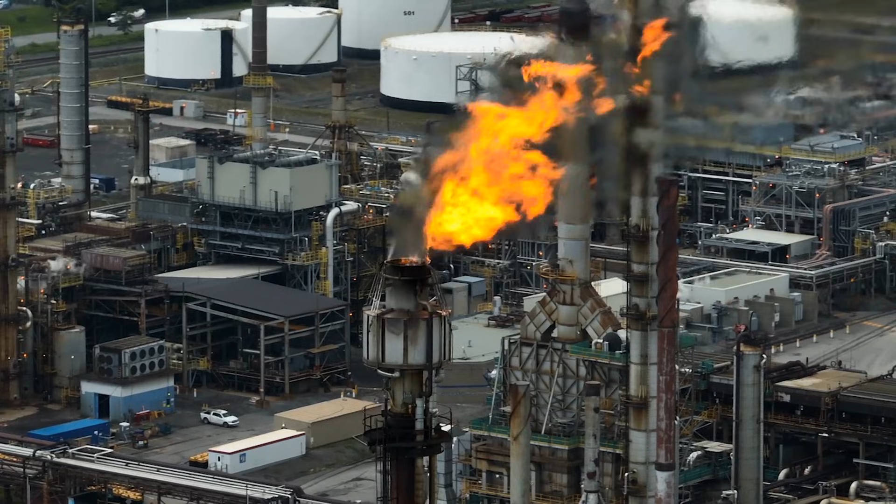On October 10th, 2024, at around 4:23 p.m., some 27,000 pounds of toxic hydrogen sulfide gas were released during a maintenance activity at the PEMEX Deer Park Refinery in Deer Park, Texas. The refinery makes more than 250,000 barrels per day of motor fuels like gasoline, diesel, and jet fuel that are exported to the US, Mexico, and Latin America. This toxic release fatally injured a pair of contract workers and injured several others.

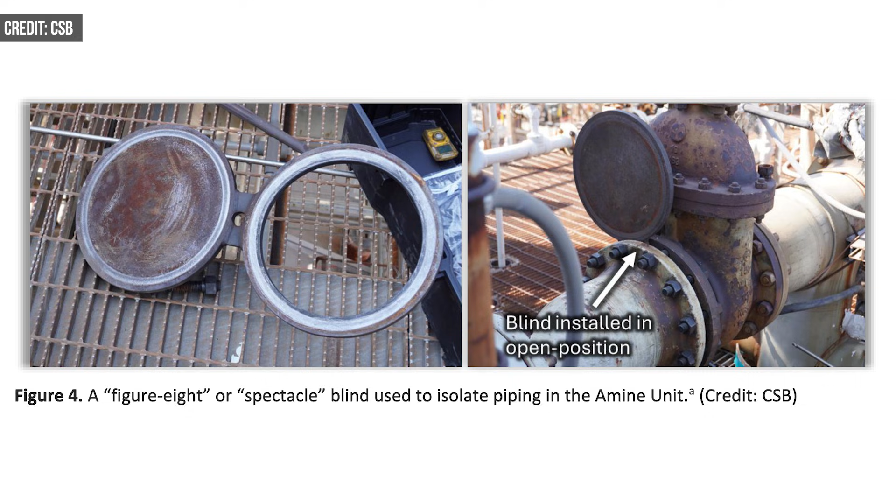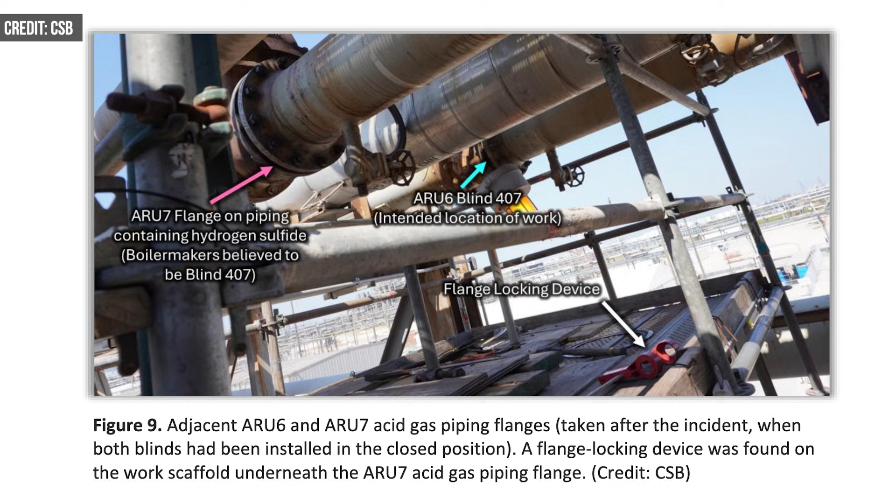So, what happened? Instead of opening a pipe flange on empty piping, contract workers from industrial service company Repcon, Inc., which specializes in welding, pipe fabrication, and maintenance, mistakenly opened identical piping about 5 feet away that contained hydrogen sulfide gas. The pipe released pressurized hydrogen sulfide gas and fatally injured one of the Repcon workers.

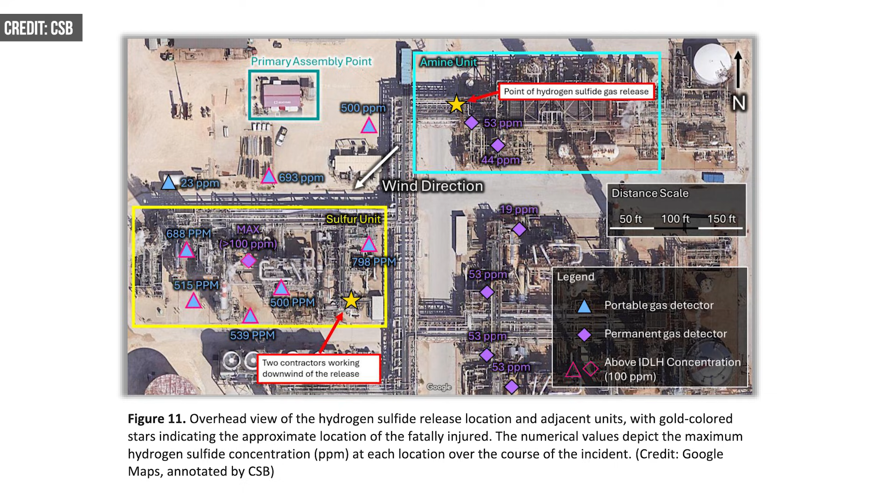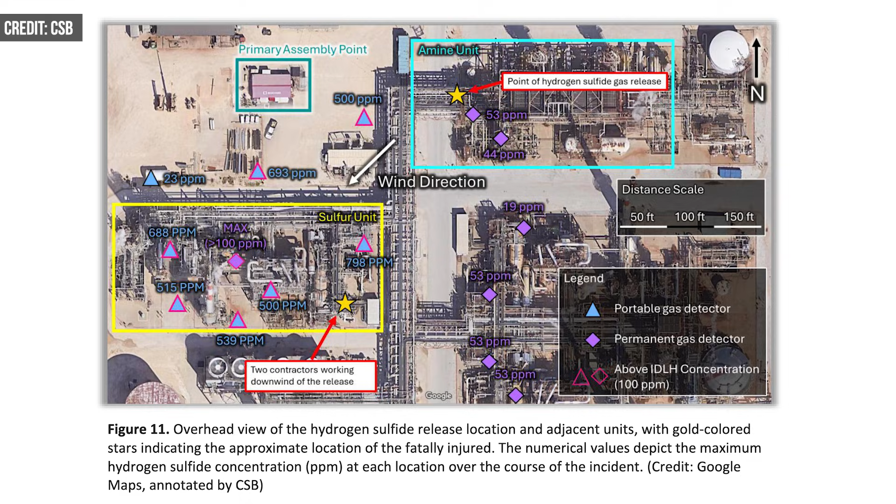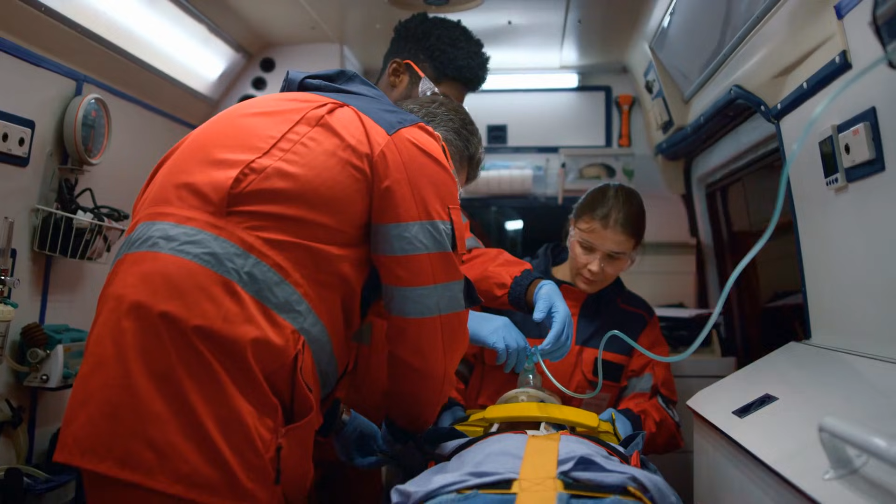The hydrogen sulfide traveled downwind, where a construction worker from ISC Constructors, an industrial engineering and construction company, inhaled the toxic hydrogen sulfide and was also fatally injured. The release continued for nearly an hour until PEMEX's emergency responders reassembled the leaking flange, stopping the release. 13 other contract workers were transferred to medical facilities and evaluated for hydrogen sulfide exposure.

Officials in Deer Park and Pasadena, Texas, issued shelter-in-place orders that were in effect for several hours. While the facility was not physically damaged, PEMEX reported property damage of $12.3 million due to the loss of use of the amine unit and downstream processes.

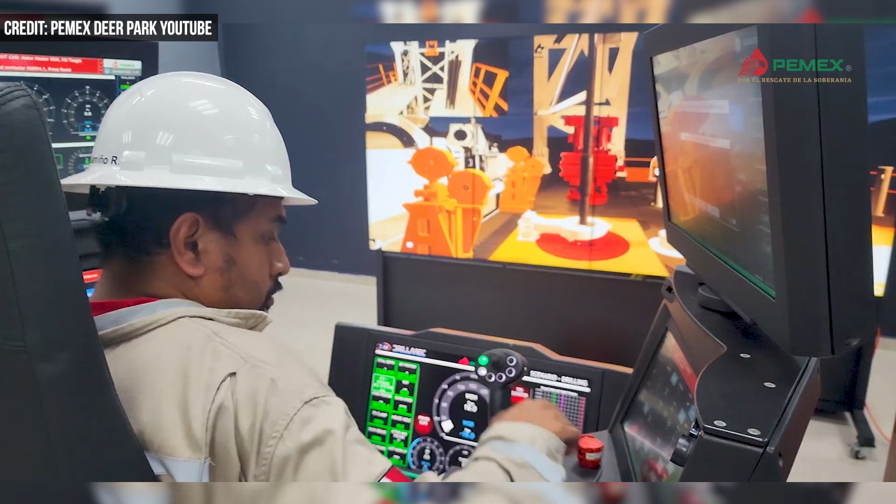This week, the U.S. Chemical Safety and Hazard Investigation Board, or CSB, released its final report following a comprehensive investigation. In a statement, CSB chairperson Steve Owens said, quote, '2 people died and the surrounding community was put at risk because of a completely preventable mistake.'

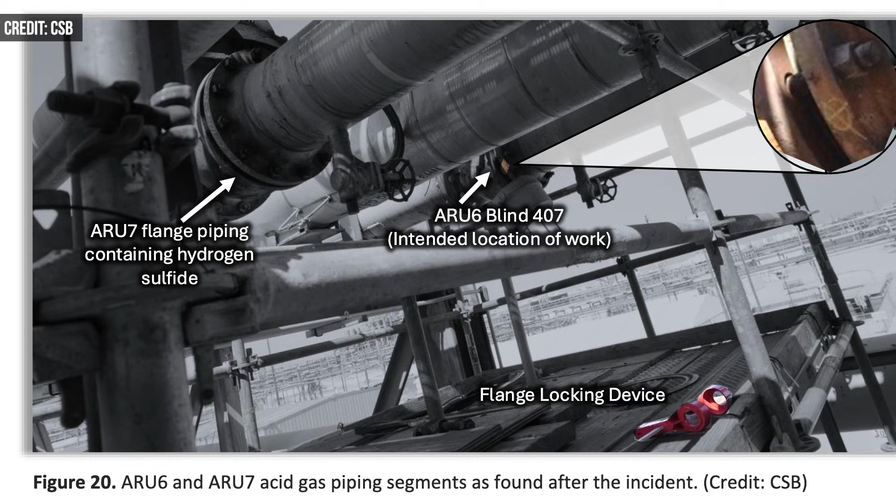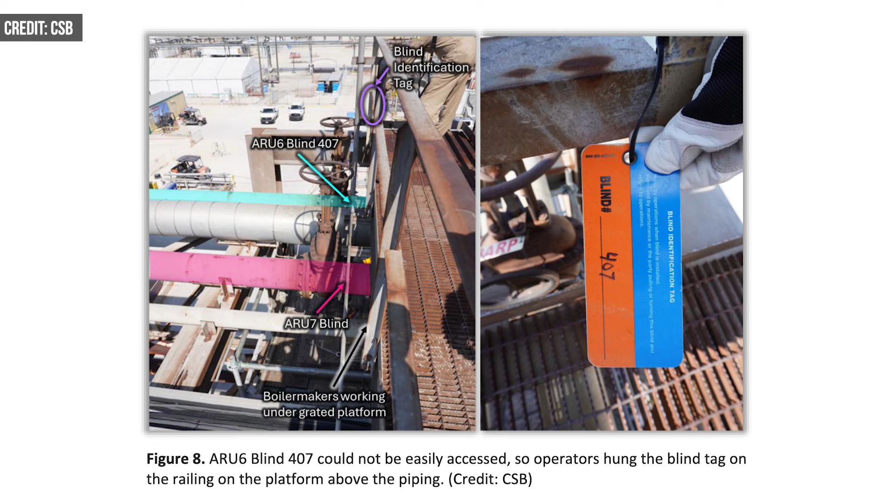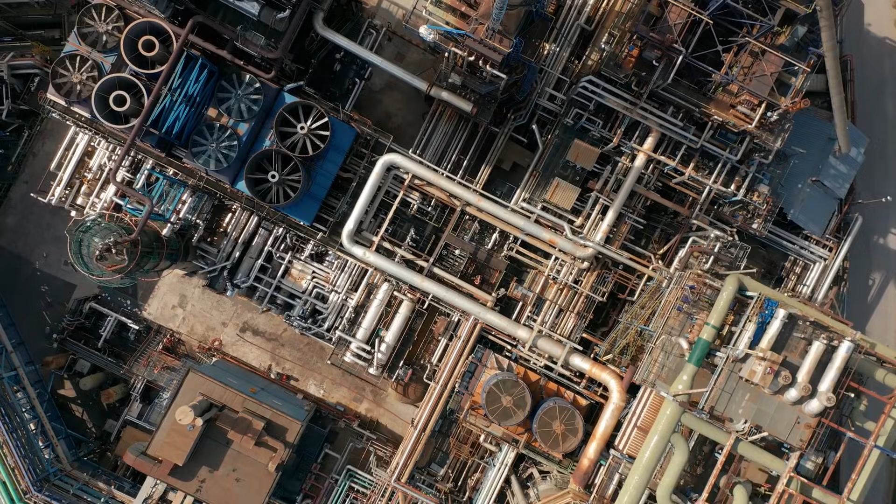The CSB found that the refinery lacked an effective method to clearly identify the correct piping flange before work began. Drawings and flange lists were insufficient to distinguish nearly identical segments, and the identification tag for the correct flange was placed out of view. According to the CSB, accidental releases from opening the wrong equipment are common in the chemical and refining industries. The agency also said no industry-wide standard currently addresses this issue.

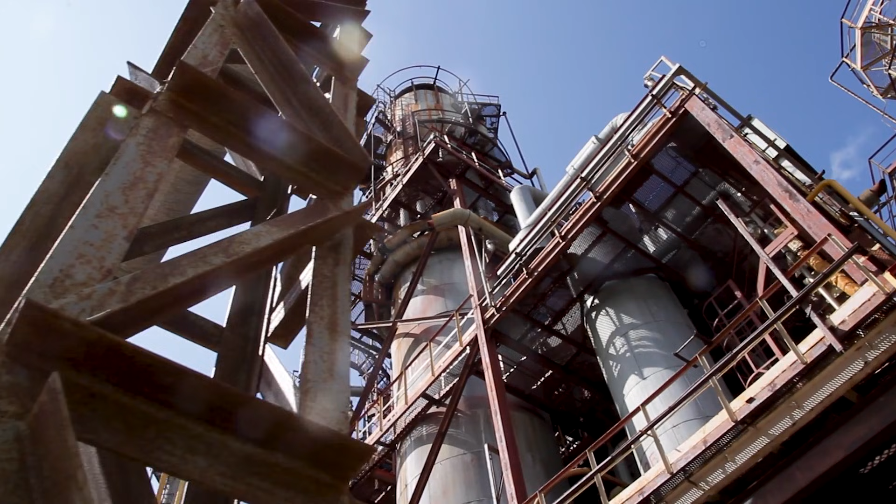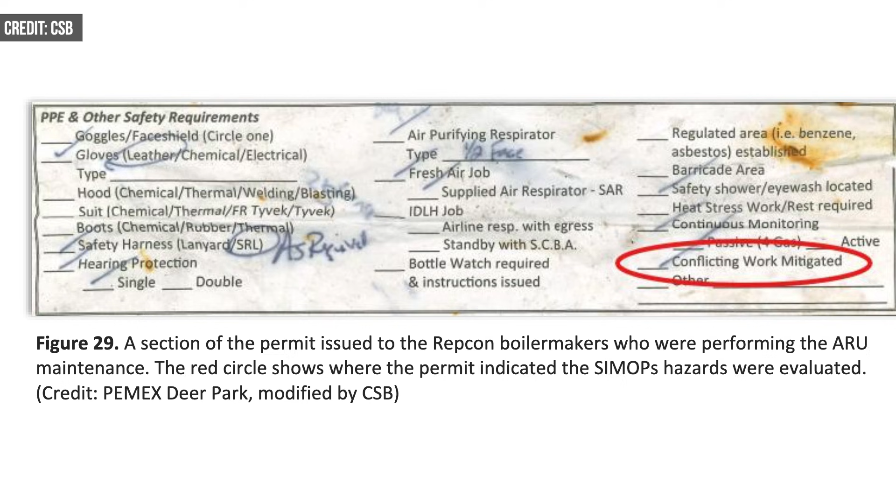The refinery had also issued a broad work permit covering multiple jobs with varying hazards and without clear hold points. Workers overlooked a written instruction to stop work and obtain an operator's presence before opening the hydrogen sulfide piping. The permit also failed to address the hazard of opening piping in an operational unit upwind from other contractors.

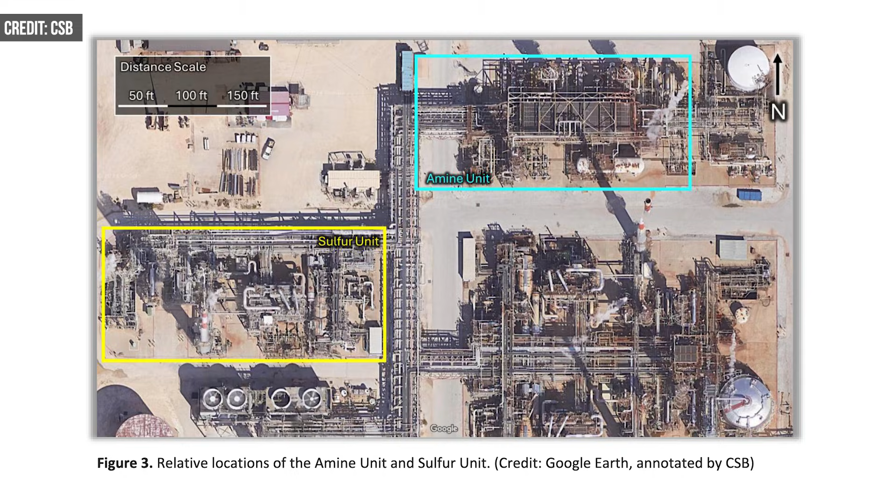On the day of the incident, workers were reassigned from a shutdown unit to a partially operational unit containing hydrogen sulfide. This abrupt change led workers to believe they were still working in the shutdown environment, and they were not specifically informed of the risks in the operational unit.

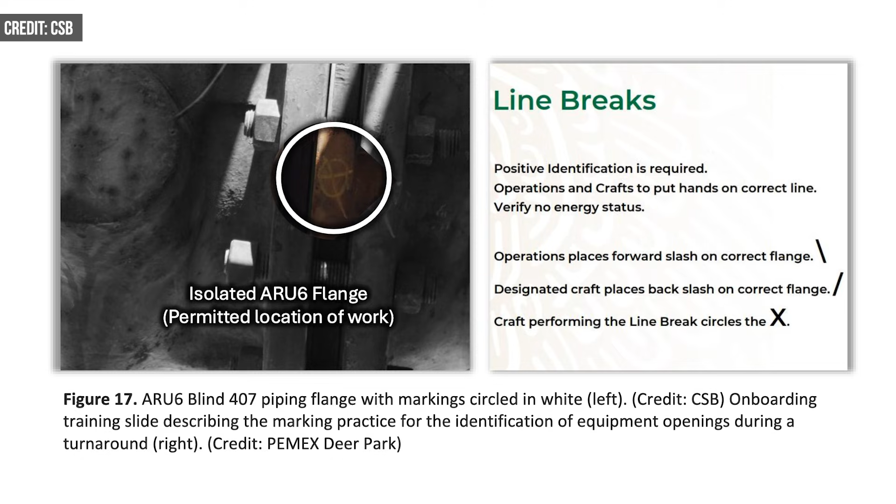Finally, the CSB found gaps between the facility's written procedures and its actual practices. While the refinery's policies aligned with industry standards, management and operations personnel often misunderstood or deviated from them.

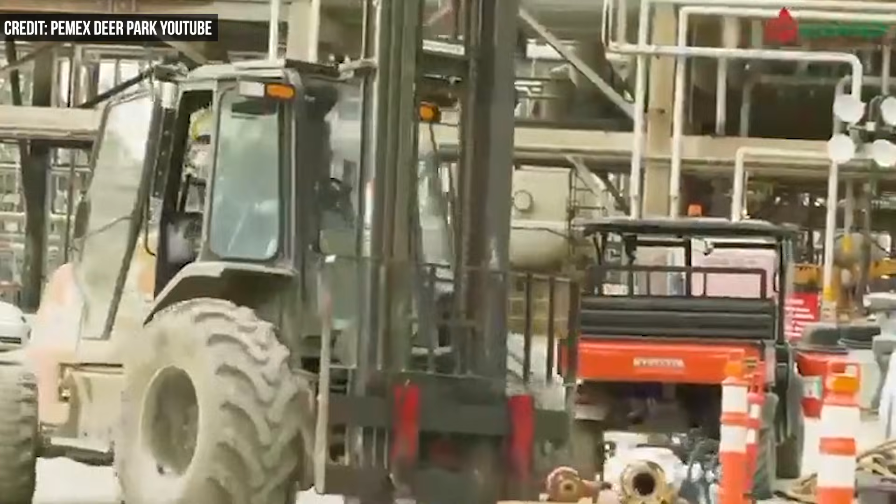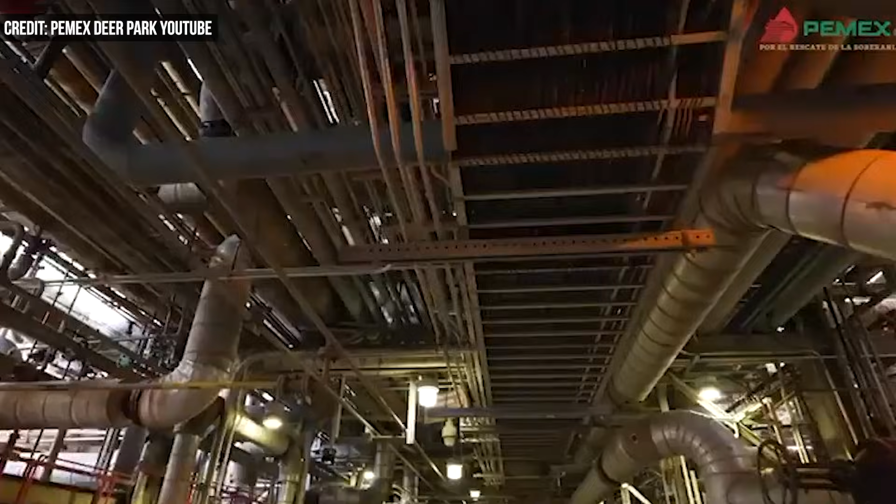The CSB's report issued several safety recommendations to the refinery and the American Society of Mechanical Engineers. The CSB recommended that PEMEX label all piping in the relevant unit at the refinery in accordance with ANSI or ASME labeling standards, implement procedures to ensure that workers are clearly informed of hazards and safeguards before beginning work, and establish a comprehensive conduct of operations system consistent with the Center for Chemical Process Safety's guidance on operational discipline, including enforceable performance metrics and routine audits.

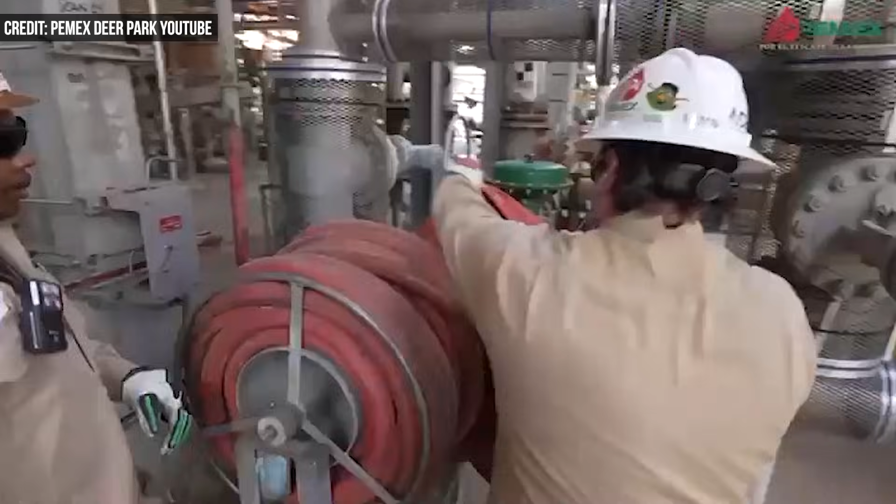Separately, the CSB recommended that ASME develop written guidelines establishing a standard practice for marking equipment prior to opening, including clear identifiers and requirements for removing markings after work is complete.

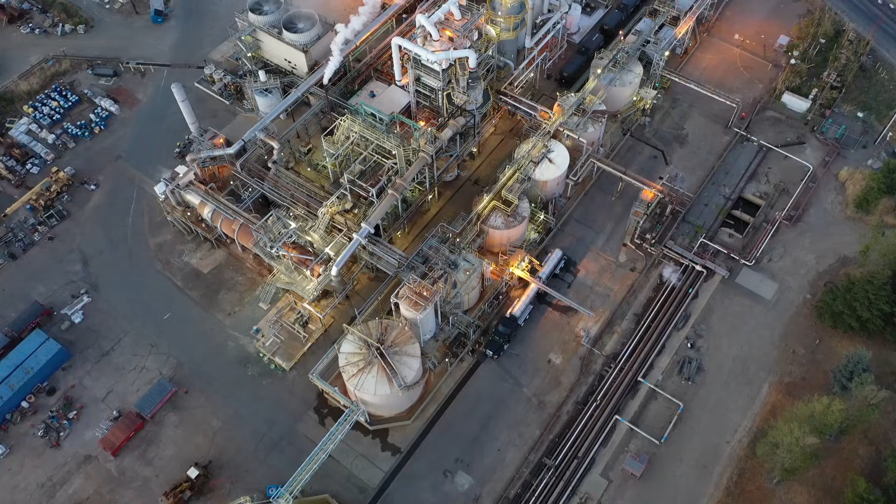PEMEX Deer Park has been operating for nearly 100 years and is the only Petróleos Mexicanos refinery in the United States that processes heavy and light crude oil from all over the world, primarily Mexico, the United States, and Canada.